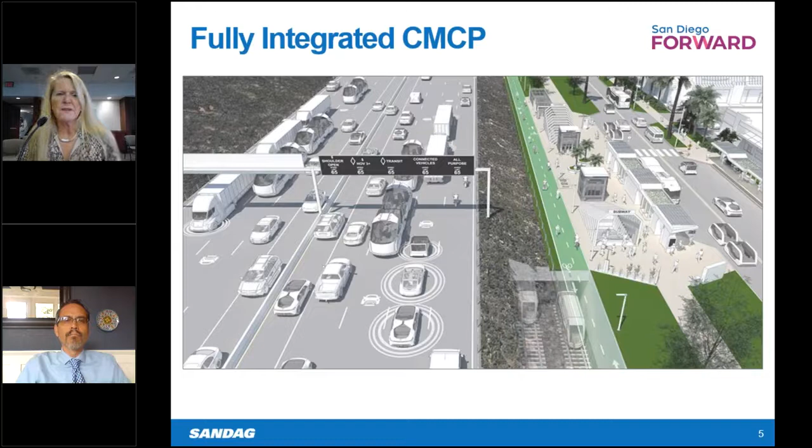The Board of Directors prioritized 12 different corridor projects in 2 phases. The first phase includes the Purple Line and I-805 South, Blue Line, I-5 South, high-speed transit with State Route 52 and State Route 67, as well as the Sprinter, Palomar Airport Road, SR 78 corridor, and the Central Mobility Hub and connections.

Now I'm going to turn it over to Richard, who's going to go through and share with you where we are in the process, how the work is getting underway, and some refinements perhaps to the project areas. And with that, I'll turn it over to Richard. Thank you.

There we go. Thanks, Colleen. So, progress to date on development of the CMCP program and the corridor plans for the San Diego region.

We held a workshop with our partners at Caltrans District 11, formed the teams, and established work plans for each of the corridors, working on defining the geographical areas for each of those corridor plans. We developed issues and opportunity statements for each of the corridors. Those appear in attachment 2 of the agenda report, and we appreciate any Transportation Committee feedback on those issues and opportunity statements.

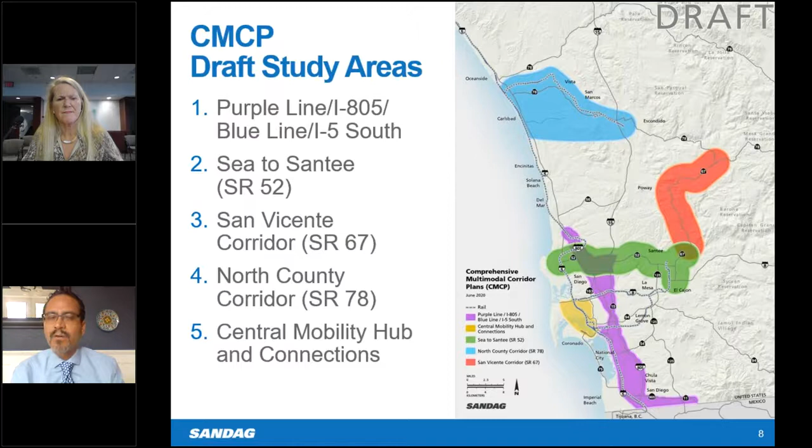On the other hand, the Sea to Santee State Route 52, San Vicente State Route 67 corridor, we're recommending that corridor be split into 2 separate corridor studies. Very different geographical conditions - State Route 67 is a very rural corridor, State Route 52 more urban. We're also expecting the policy considerations to be quite different in those 2 geographical areas, so we're recommending that corridor be split into 2. The North County corridor, State Route 78, is shown in blue in the exhibit, and the Central Mobility Hub and Connections corridor study area is shown in yellow.

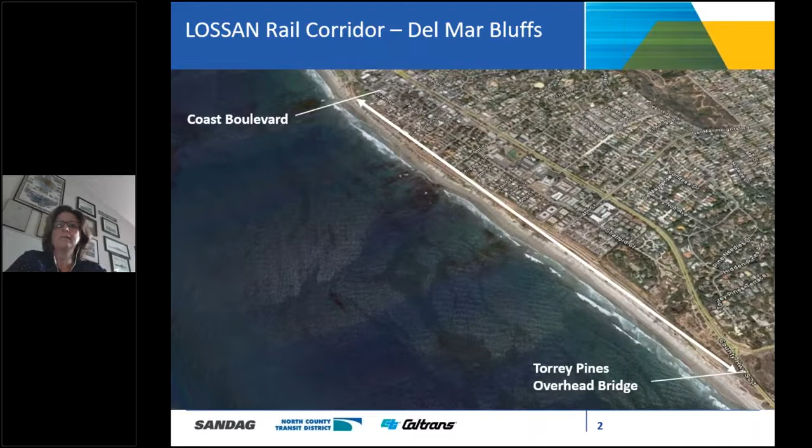Okay, great. Thank you. Item 7 provides an update on both the current work to stabilize the LOSSAN rail corridor along the coastal bluff area in Del Mar, and an upcoming study to analyze realigning this segment into a tunnel and off the bluff. Attachment 1 of the staff report shows how this segment fits into the overall Southern California rail network, and here we've zoomed in on that specific corridor along the bluff. It's a single track segment, very busy, over 50 trains a day use this segment of our rail corridor.

Currently, SANDAG and NCTD are working on two efforts, as I said, in terms of stabilizing the track bed in this segment of the railroad corridor, which is subject to erosion. The last few years, in particular, that erosion has happened in episodes. Over the last 20 years or so, though, SANDAG and NCTD have worked to limit that kind of erosion and bluff retreat. Last Thanksgiving, in fact, we had a very severe storm that overwhelmed a lot of the drainage along this segment, and it did result in some significant emergency repairs. You can see some of the damage in the photo there.

We are right now under construction of some of the more urgent repairs, in addition to the emergency work that took place. We call this phase 4 repairs, and that construction is underway now and should finish up this fall. And a lot of our agencies, SANDAG and NCTD, are heading up a $100 million effort to find funding to complete phases 5 and 6 - phase 5 being up on the top of the track bed, around where the photo is, and phase 6 being down on the beach level, both working together. We're happy to have received a state grant announced a couple months ago, and Hassan mentioned the federal grant last week. We're also working on another application for state funding to complete funding requests for phase 5. So that's been a concerted effort on a lot of agencies' part, and it's paying off in terms of these state and federal grants.

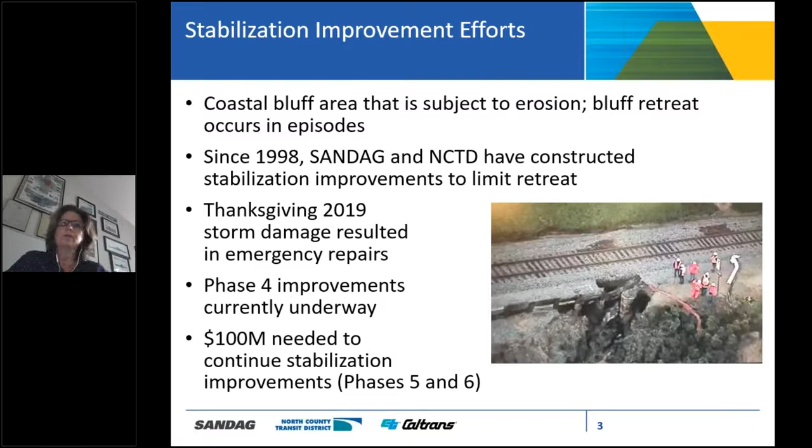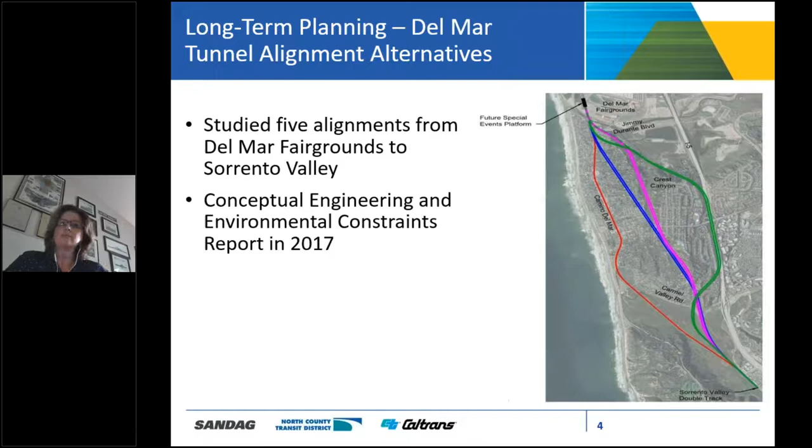The second effort we are working on is a long-term study. In 2017, Sandag finished a conceptual engineering study of 5 potential alignments to move the corridor from the Del Mar Bluff area into a tunnel segment. You see the 5 lines on the map, there's actually 2 greens, a bit hard to see at this scale. North is at the top, and that's the Del Mar Fairgrounds. We'll go through the 5 segments in more detail, and we'll be building upon this study as we start the next phase of work.

There were some points in that 2017 study worth mentioning. Each alignment would start at the north end at the San Dieguito Lagoon, come through the city of Del Mar, and then into the Los Penasquitos Lagoon, connecting back into Sorrento Valley. About 5 miles is the study area for all of them, but not all of that 5 miles is tunnel. The underground sections range from 1.5 to 2.5 miles. We have one more shallow alternative under Camino Del Mar through the city, proposed as a cut and cover trench, while all others were proposed as bored tunnels, very deep in some areas.

This is a cross section to give you an example of a twin bore tunnel. When making this improvement, we would definitely be adding a second track - that's a priority for the region, adding capacity so additional service can be run. Each track would be in its own bored tunnel, the right and left, and in the middle was proposed an emergency access tunnel. You can see the ground level above with the dashed line. That's one example of what we were discussing in the 2017 study.

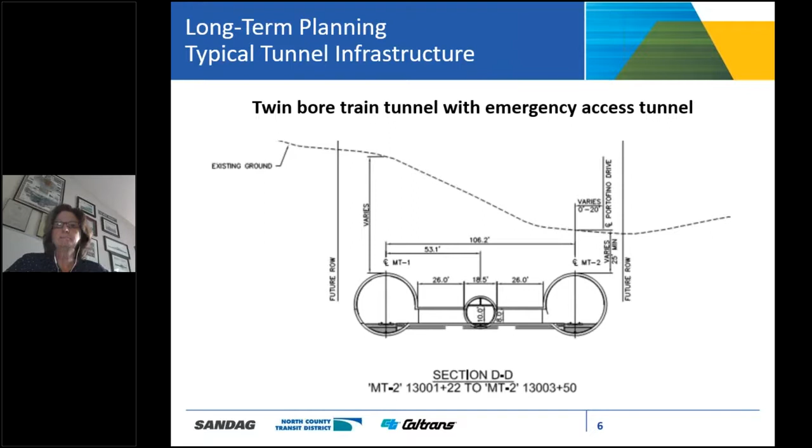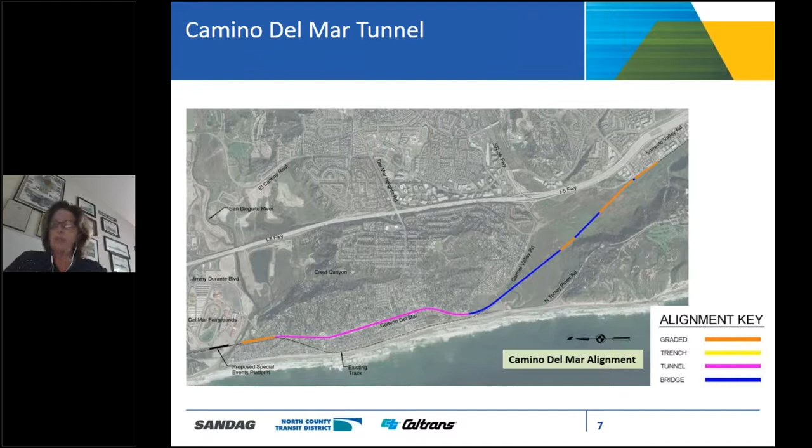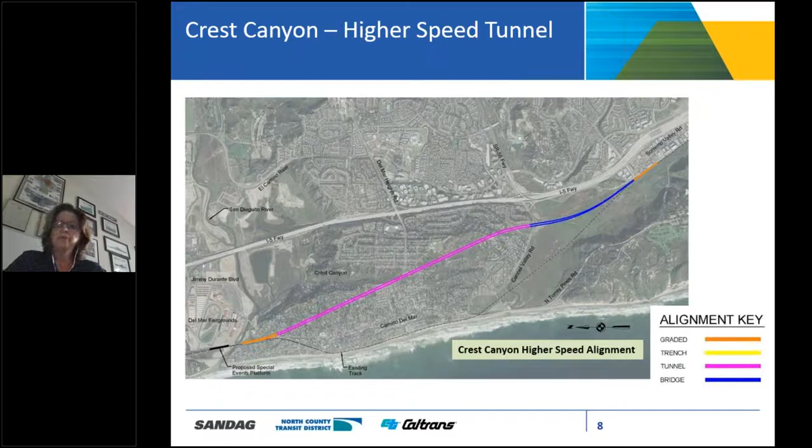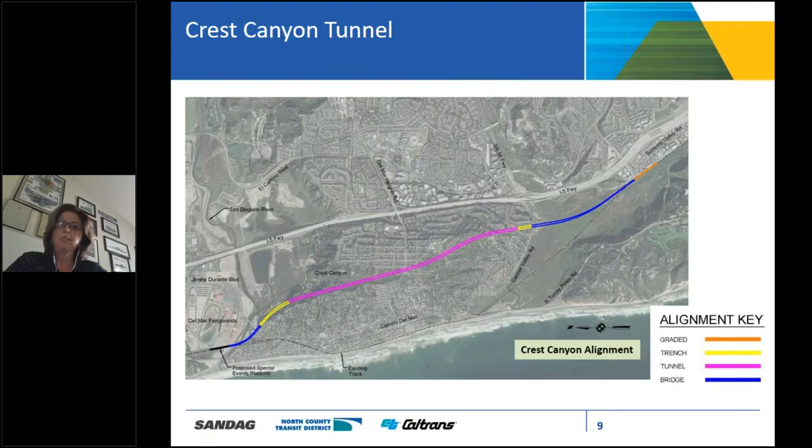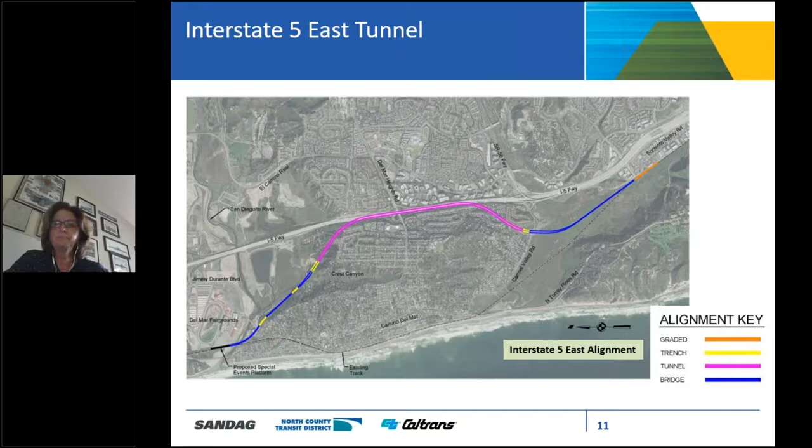Next slide, please. We're about to embark on an update of the study.

Here's what we hope to accomplish in the study: first, to take a look in this specific area of those 5 tunnel alignments with the idea of doing additional technical analysis, additional conceptual engineering, to narrow from 5 to some lesser number. And then we would do a lot of supporting analysis, not only in this corridor but the entire 60-mile San Diego corridor. So outside these tunnel alignments, we'd be looking at other proposed improvements, all around the goal of reducing travel times, increasing our capacity so we can add additional service, and then enhancing safety.

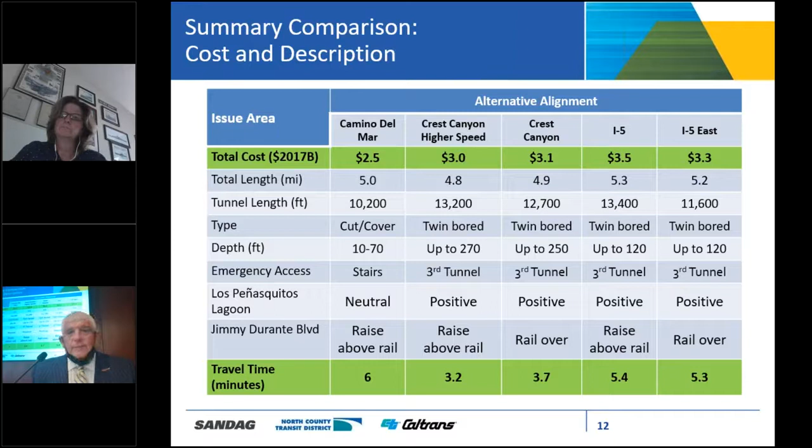Matt, did you want to weigh in? Yes, sir. Just a couple of comments.

First, just to go back to Board Member Edson, I think when we look at these different alignments, when we talk about speed, I would steer everybody to focus on a bigger question: the travel time from end to end. I know Linda and Hassan and Sandag are well aware of it. There could be incremental improvements in speed rating for a specific segment of the track, but the more focus is going to be reducing the end-to-end travel time. In fact, if you looked at some of the study from the Miramar Tunnel, that identifies significant end-to-end travel time savings. That's just a comment.

Secondarily, as we go through this analysis that's critical and important, and we are absolutely on board working closely with Sandag, I think it's important for our elected officials to keep in mind that as we look at the criteria that Hassan mentioned we're going to need to develop, it's going to be well beyond just the cost to build. Tunnels have significant costs associated with maintenance. One of the things as we go through that process, we're going to have to make sure we understand what those costs are, and the critical piece as we work through this is identifying the funding. My orientation as the executive director would be to make sure that if we talk about a capital project - and I know Hassan would already be thinking of this - we have to identify the operating costs and maintenance money at the same time. Those tunnels are not inexpensive to maintain. It's just critical that we do it.